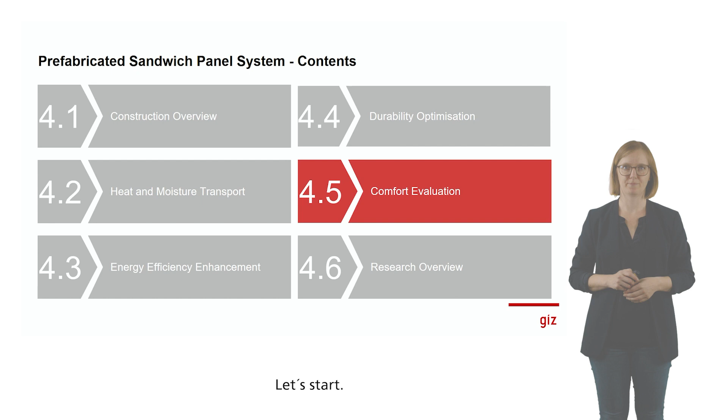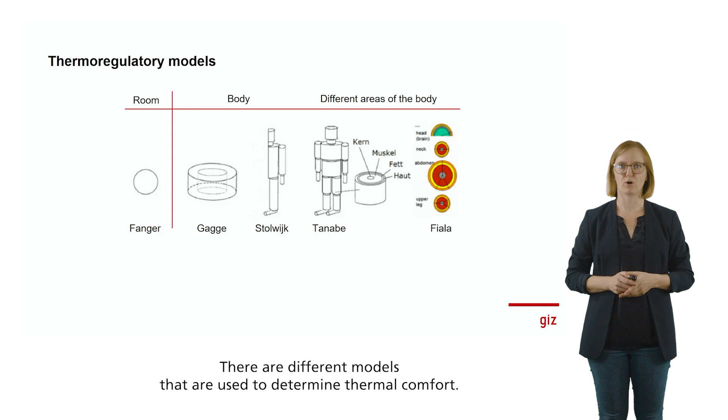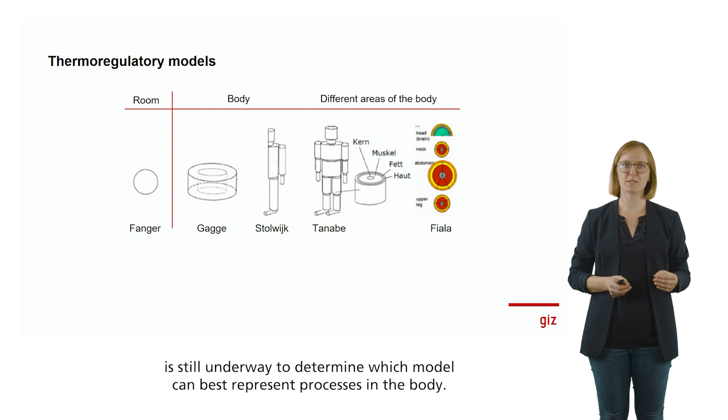Let us start. There are different models that are used to determine thermal comfort. These models differ strongly in terms of complexity and accuracy, and research is still underway to determine which model can best represent processes in the body.

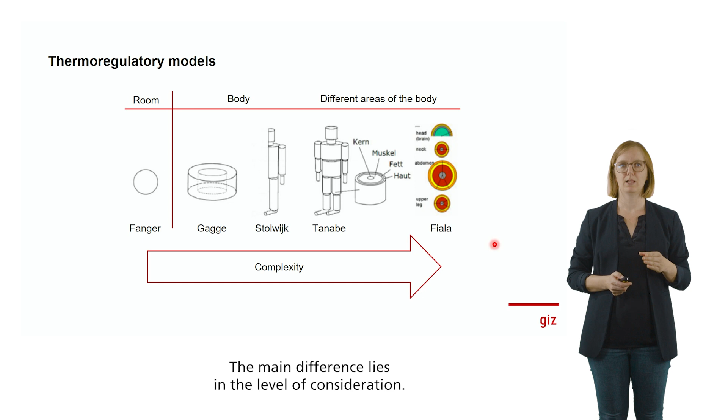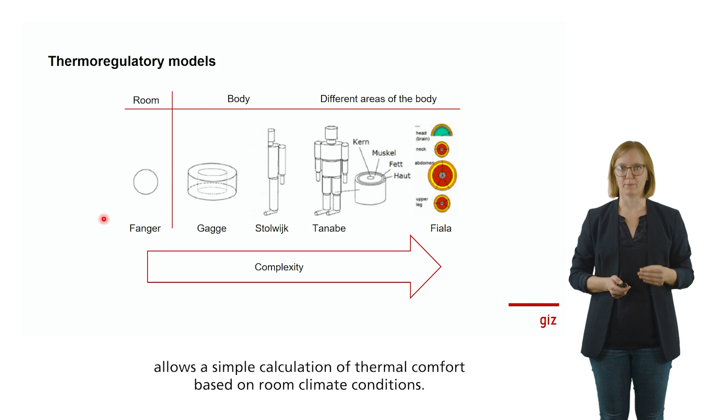Here you can see an overview of different assessment methods, whose complexity increases significantly from left to right. The main difference lies in the level of consideration. The Fanger model on the far left, for example, allows a simple calculation of thermal comfort based on room climate conditions. The further to the right we go in this overview, the more detailed the body functions are included in the assessment. This rational approach is used to describe the reaction of the human body to a thermal environment.

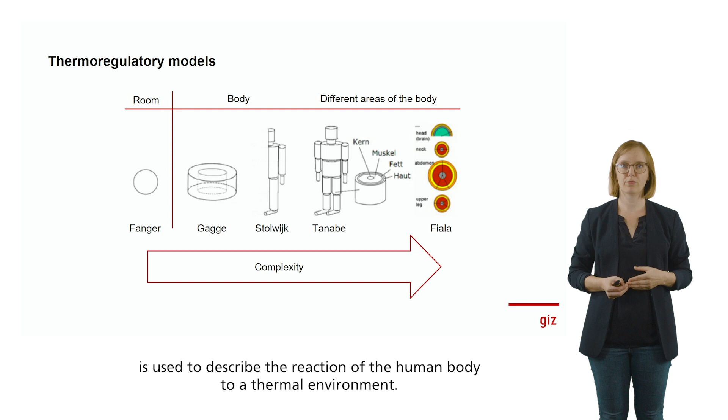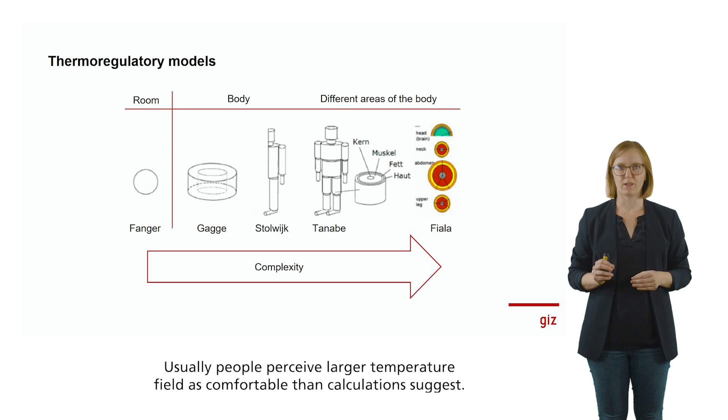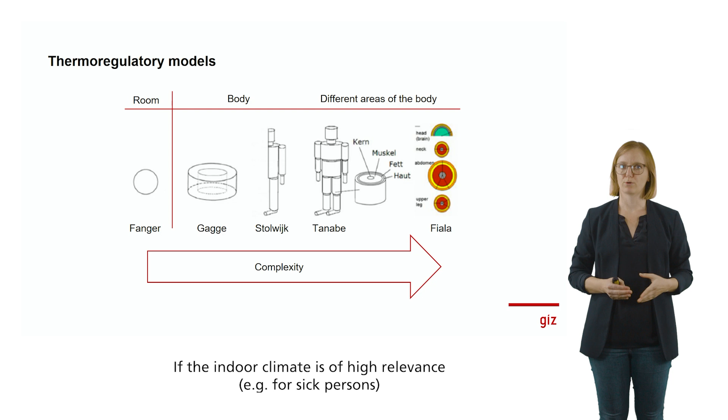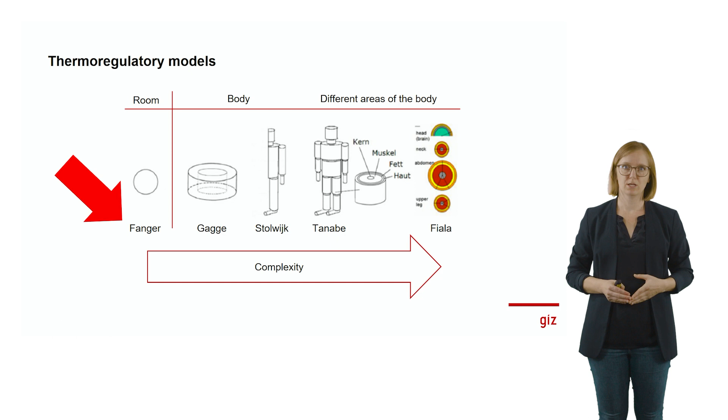What all models have in common is that the ability of thermal adaptation is not considered. Usually people perceive larger temperature fields as comfortable than calculations suggest. Current research shows that especially people in India are very adaptable to different climates. Most of the time, consideration according to the simplest model, the Fanger model, is often sufficient because it indicates tendencies. If the indoor climate is of high relevance, for example for sick people, a more detailed consideration is necessary. In most cases, however, the Fanger model is used for simple evaluations, and so we will focus on it now.

The Fanger model is used to derive an index for predicted thermal sensation for the combination of different variables. The prediction of thermal sensation is influenced by metabolic rate, clothing insulation, air temperature, air velocity, mean radiant temperature, and relative humidity.

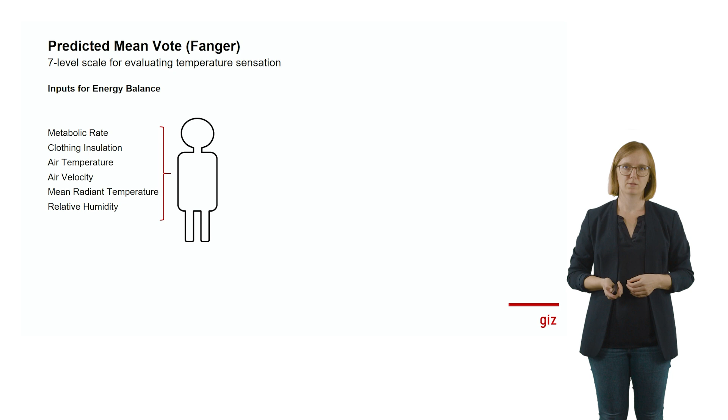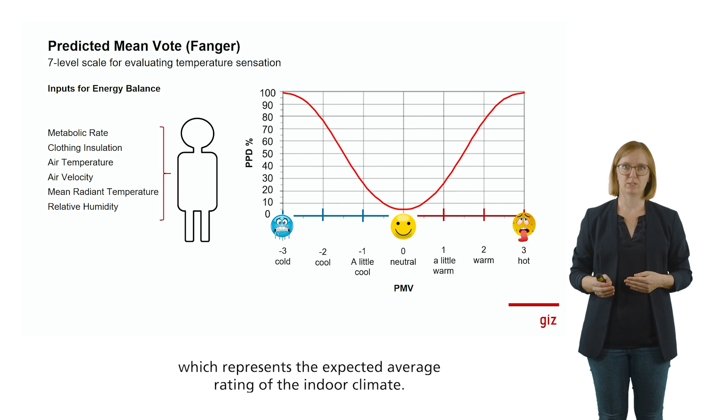The quantification of the thermal sensation is done with the help of a 7-step scale, which represents the expected average rating of the indoor climate. The PMV can predict how the average evaluation of the thermal indoor climate will be made by a larger number of people.

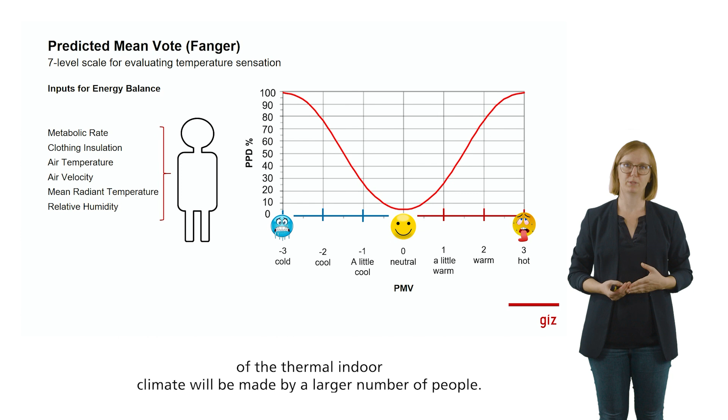The PMV is used to determine the percentage of people who are potentially dissatisfied with the indoor environment. It's called the predicted percentage of dissatisfied, PPD. The Fanger model assumes that 5% of people are always dissatisfied with the indoor climate. So if we now know all conditions like metabolic rate, clothing insulation, air temperature, air velocity, mean radiant temperature, and relative humidity, we can then calculate the PMV, the predicted mean vote. If, for example, we calculate a PMV of 1, we can guess that around 25% of people will be dissatisfied with the climate.

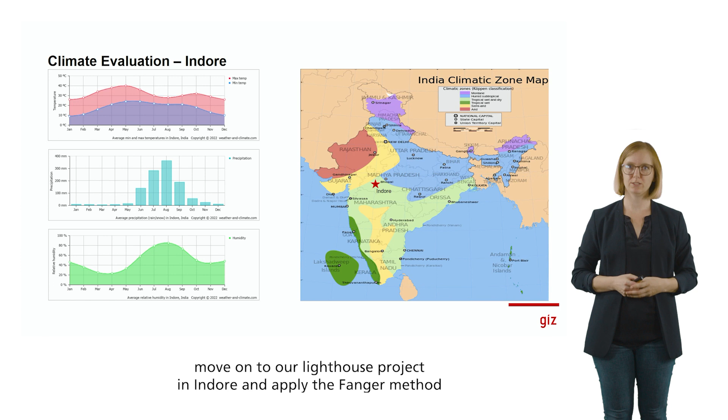Let us now move on to our lighthouse project in Indore and apply the Fanger method to the anticipated indoor climate in the constructed buildings there. Here you can see the climate of Indore. Indore is located in central India. The climate zone there is defined as tropical wet and dry.

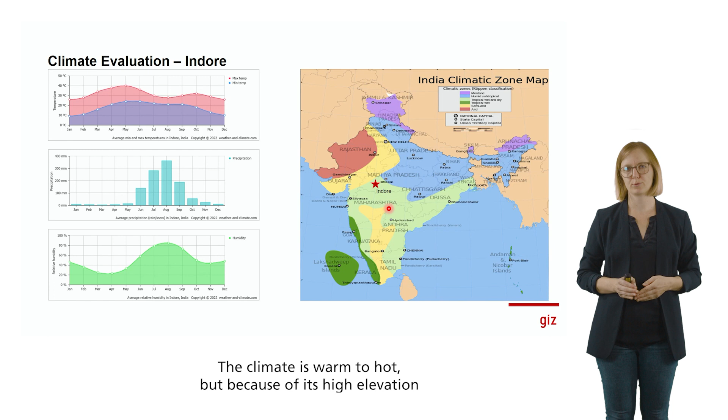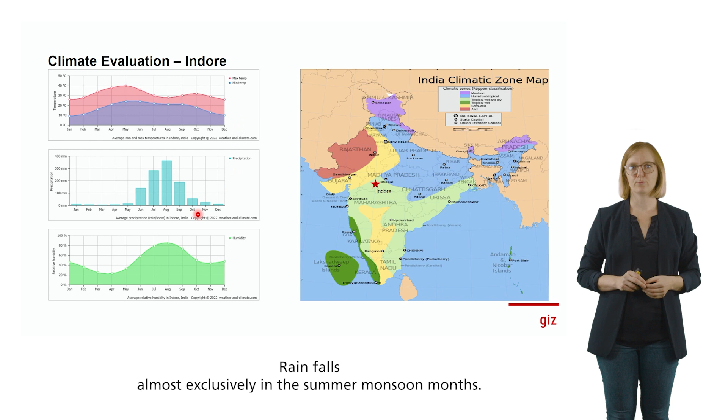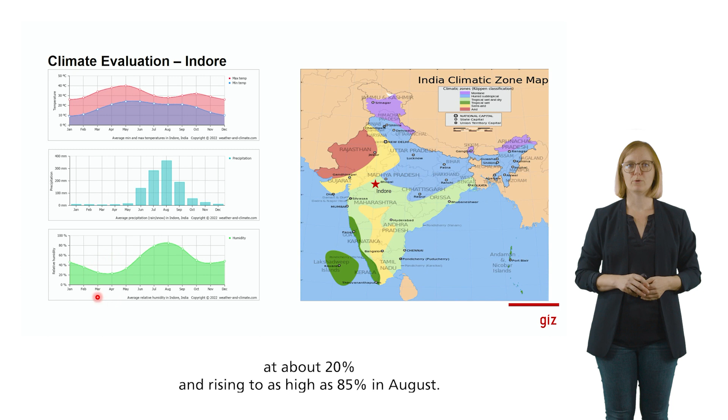The climate is warm to hot, but because of its high elevation and inland location, even during the hottest month, the nights are relatively cool. Rain falls almost exclusively in the summer monsoon months. Relative humidity varies through the year, being lowest in April at about 20% and rising to as high as 85% in August. In the following, the thermal comfort is determined with the help of the model according to Fanger.

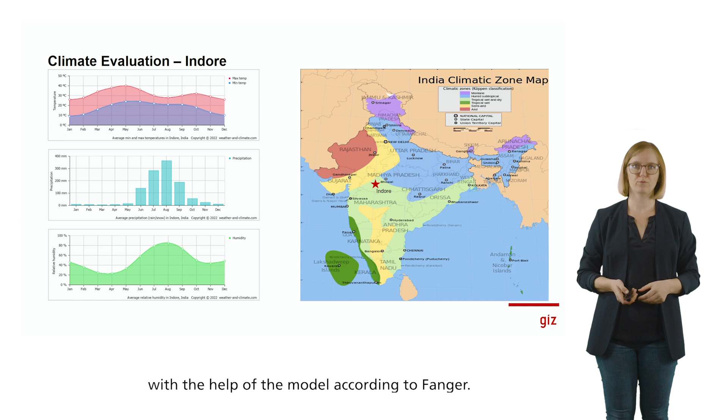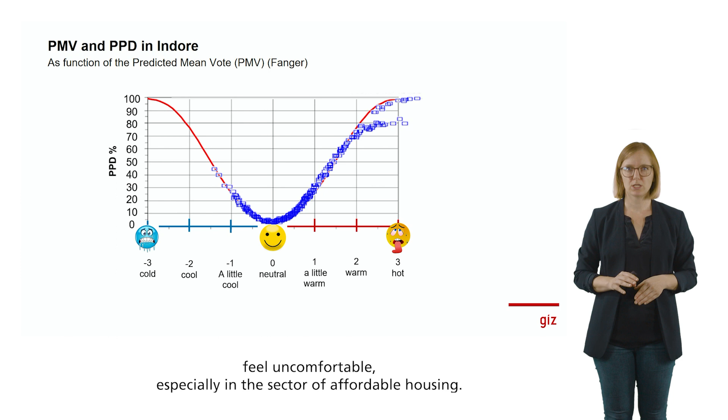Normally, we accept that not all people are comfortable with the climate. In fact, we assume that 5% of people will always be uncomfortable no matter what. Generally, we are also willing to accept if 10 to 20% of residents feel uncomfortable, especially in the sector of affordable housing. However, when the dissatisfaction exceeds over 20% with a PMV greater than 1, we usually see a need for action to improve the climate.

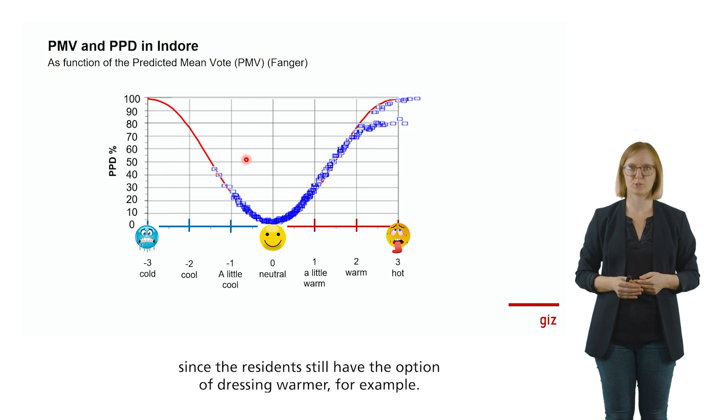Here we see that we can still accept the dissatisfaction due to the cold. We don't necessarily have to do anything here, since the residents still have the option of dressing warmer, for example. The situation is different when temperatures are too warm. We see that on many days of the year, up to 100% of residents will find the climate far too hot. So then, there is an urgent need for action here.

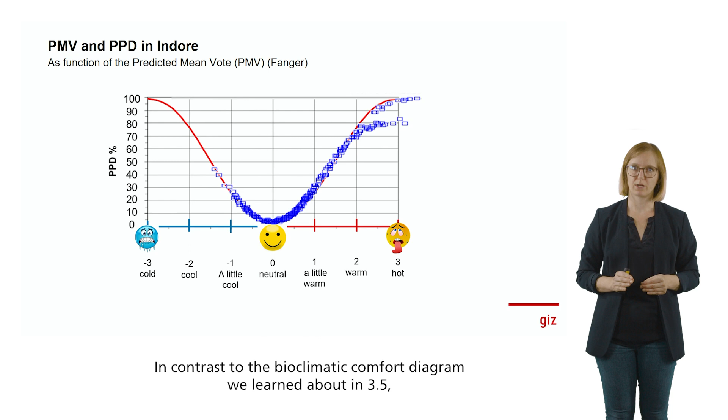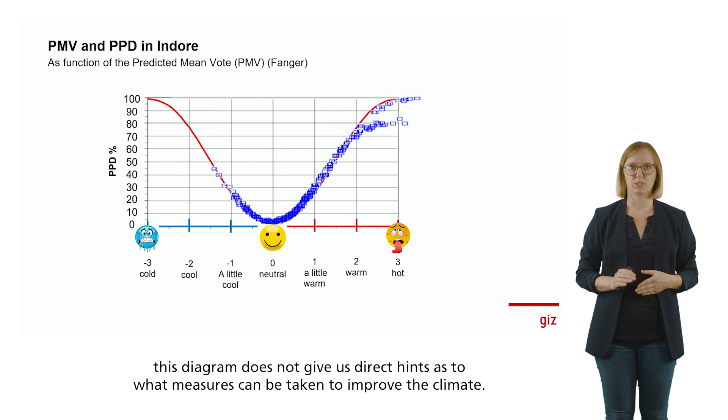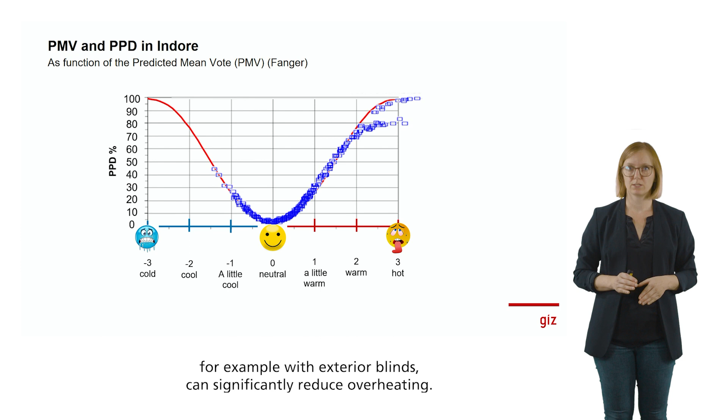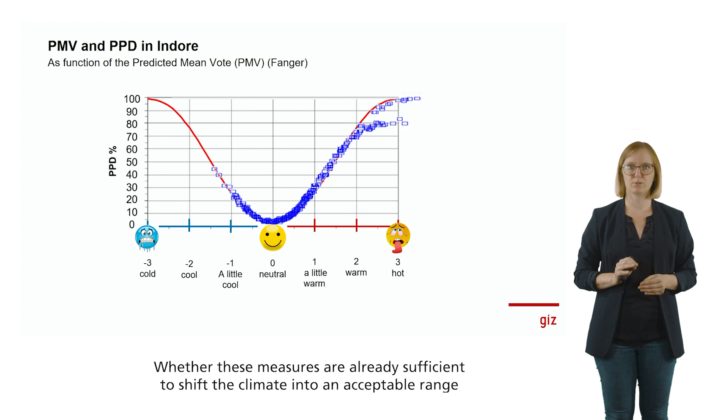In contrast to the bioclimatic comfort diagram we learned about in Module 3.5, this diagram does not give us any direct hints as to what measures can be taken to improve the climate. But in previous modules, we have already learned that shading the windows, for example with exterior blinds, can significantly reduce overheating. In addition, a ceiling fan usually also brings an improvement due to the higher airspeed. Whether these measures are already sufficient to shift the climate into an acceptable range cannot be predicted without further analysis.